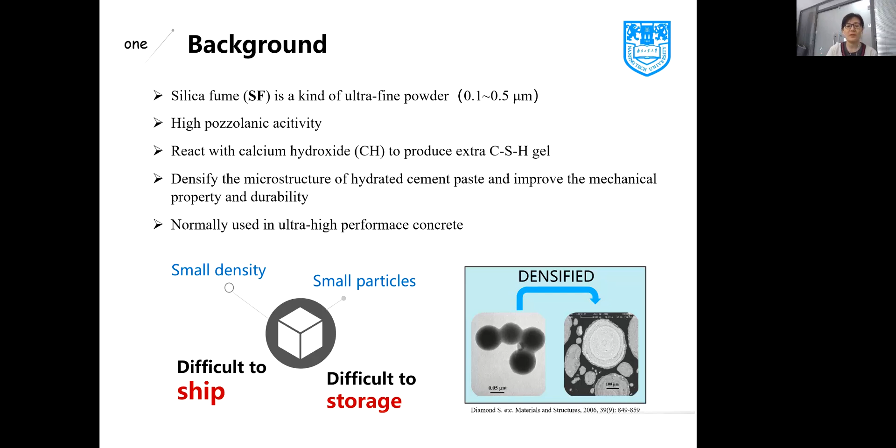Just as it has small density and small particles, it's difficult to ship and also difficult to store. So in the market, it was normally densified. There are many methods to disperse densified silica fume in the using process, such as mixing by mixer, ultrasonic treatment, or using dispersant. But it's hard to disperse densified silica fume to micron-sized particles by using a concrete mixer. There are still many large silica fume agglomerations in cement-based materials.

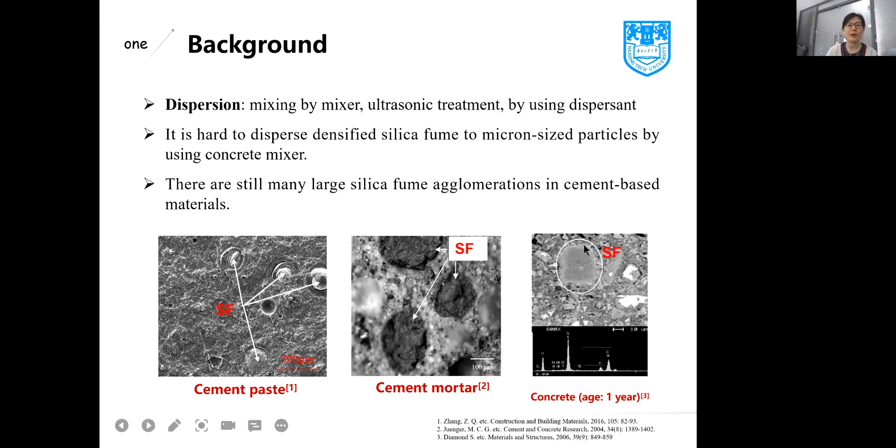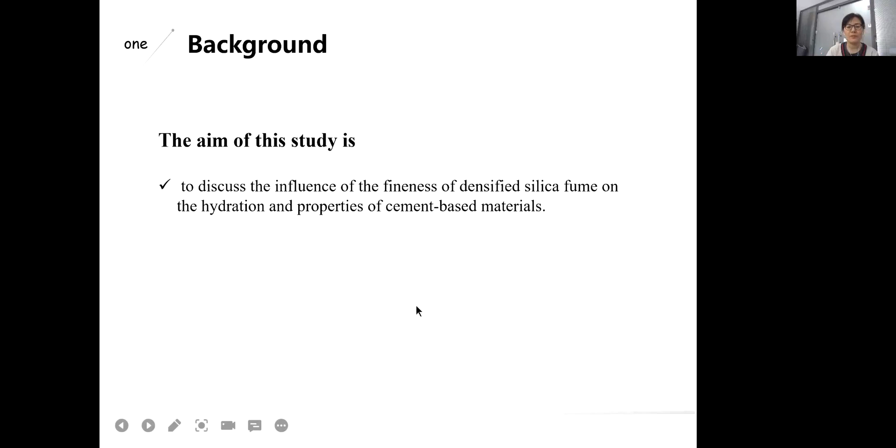From these 3 figures, you can see from cement paste, cement mortar, to concrete, even at 1 year of curing, there are still many large silica fume particles. So the aim of this study is to discuss the influence of the fineness of densified silica fume on the hydration and the properties of cement-based materials. We just focus on the size of silica fume.

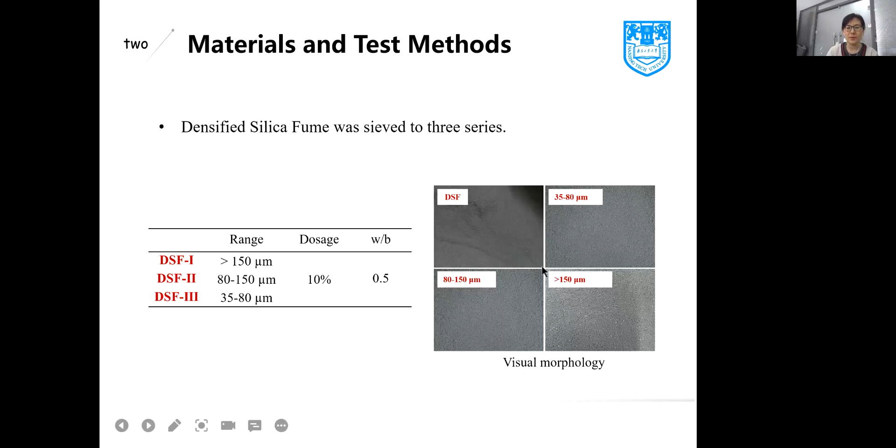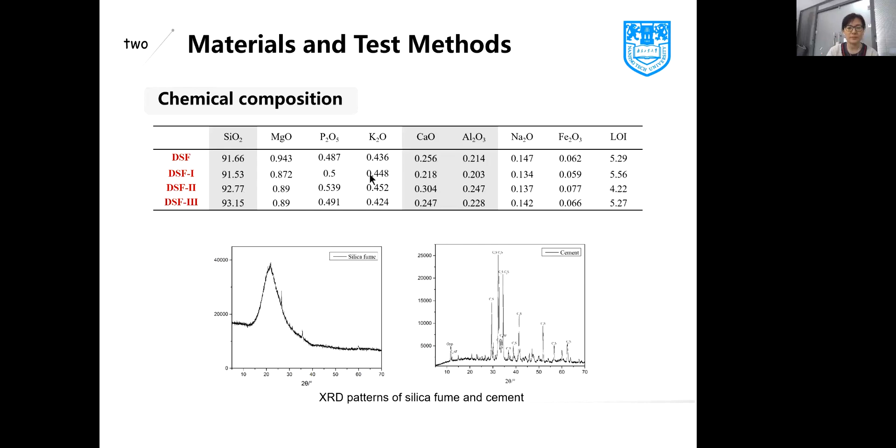The used densified silica fume in this study was sieved to 3 series. The dosage is 10%. Water to binder ratio was 0.5. This is the visual morphology of different types of densified silica fume. We studied the chemical compositions. You can see the change of the fineness of silica fume has no obvious influence on the chemical composition, but it influences the particle size distribution.

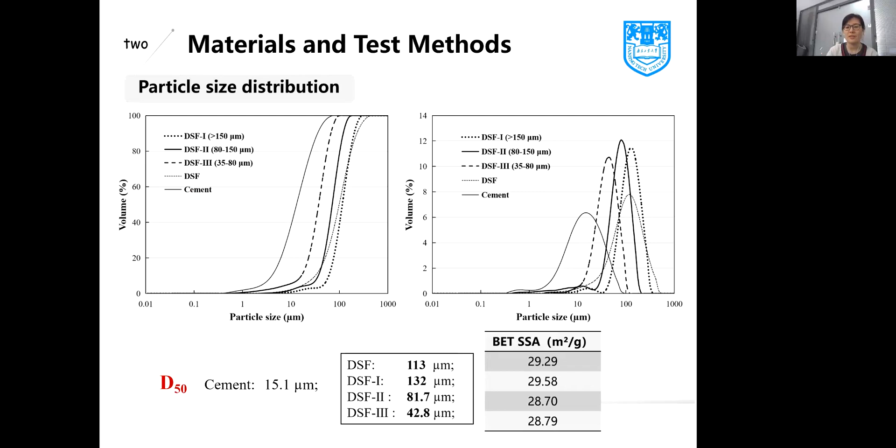It's interesting, we also did the BET specific surface area. The change of the fineness of densified silica fume has no influence on the BET specific surface area. It's around 30. We also studied the SEM image. You can see the size or the morphology of densified silica fume has no obvious change after 1 day of curing. It still exists in the hydrated cement paste as densified particles.

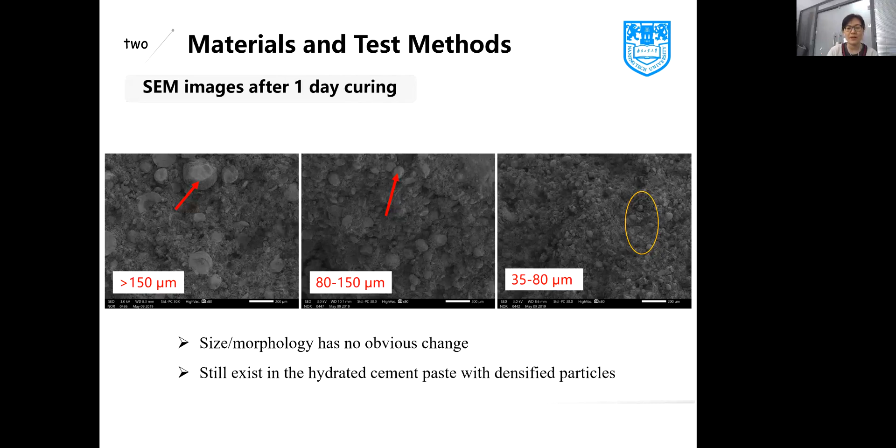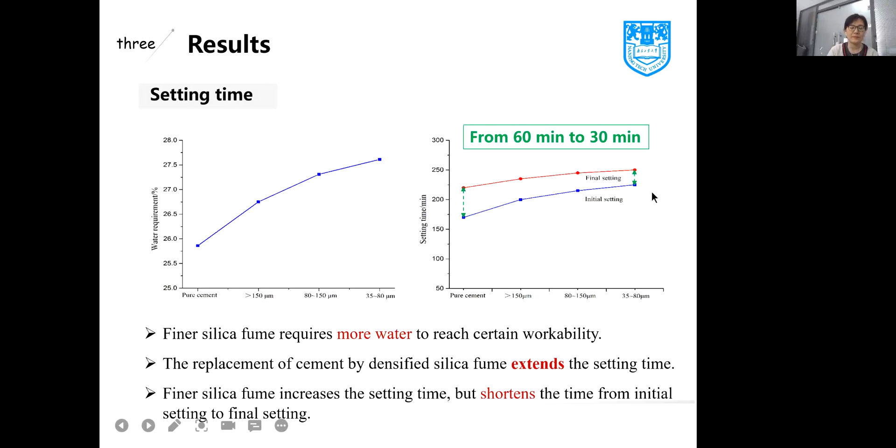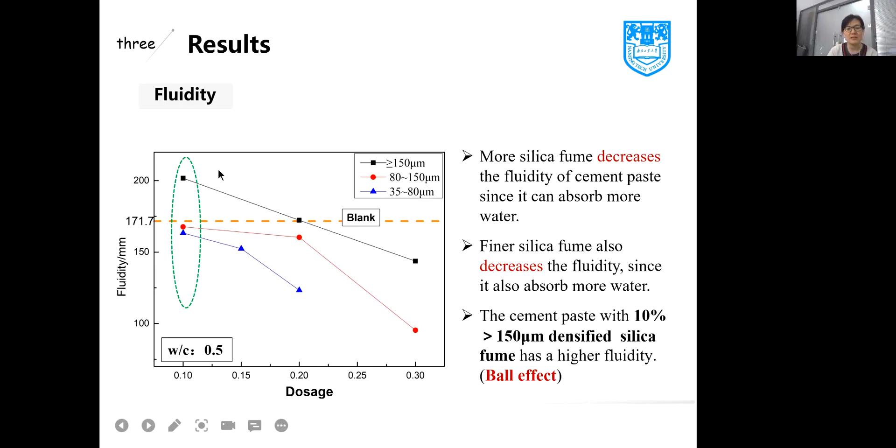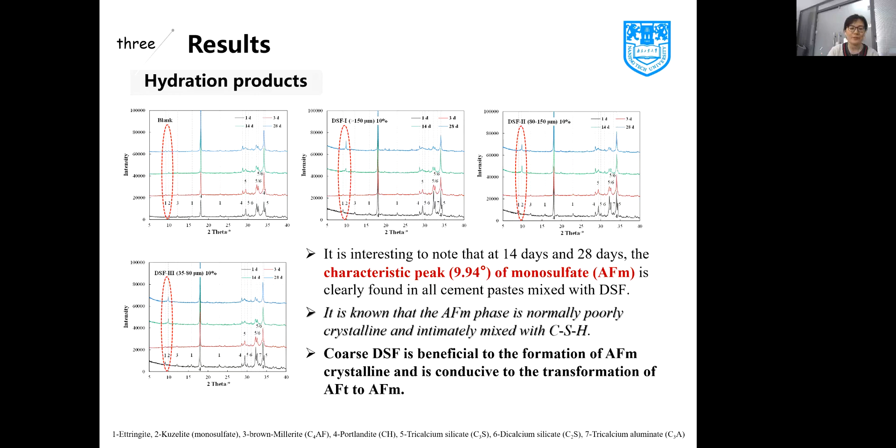We also studied the hydration products of cement paste by using XRD technique. It's interesting to note that at 14 days and 28 days, the peak of monosulfate is clearly found in all cement paste mixed with densified silica fume. It's known that the AFm phase is normally poorly crystalline and intimately mixed with C-S-H. Coarse densified silica fume is beneficial to the formation of AFm crystalline and is conducive to the transformation of AFt to AFm.

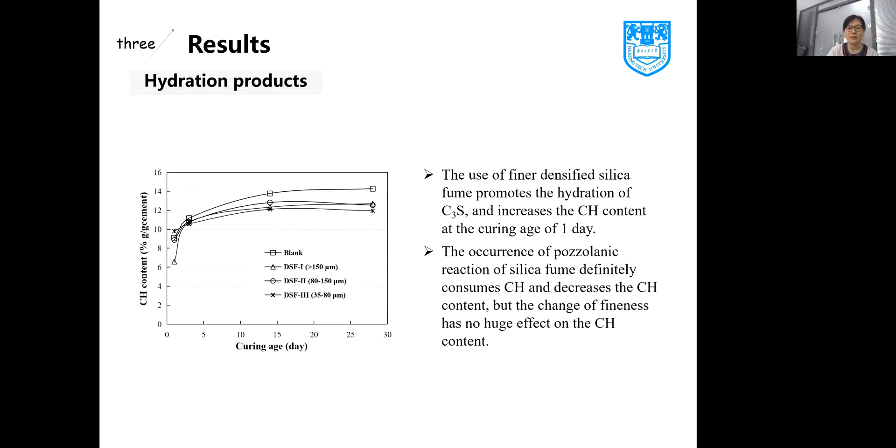The use of finer densified silica fume promotes the hydration of alite and increases the CH content at the curing age of 1 day. The occurrence of pozzolanic reaction of silica fume definitely consumes calcium hydroxide and decreases the calcium hydroxide content, but the change of fineness has no huge effect on the CH content.

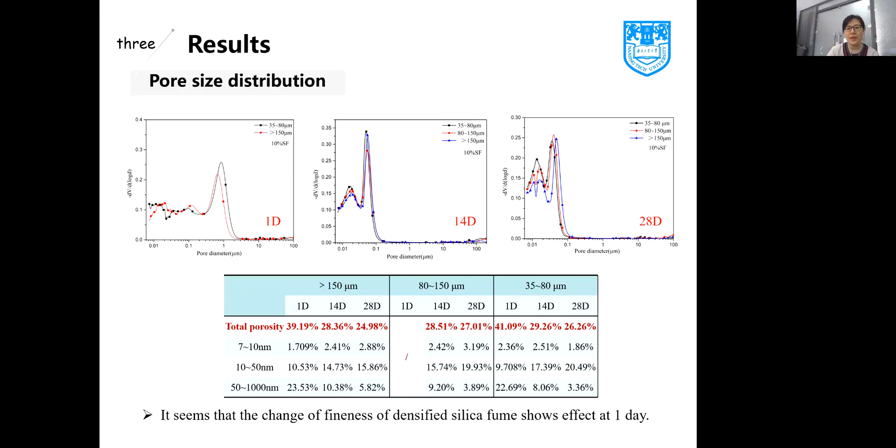We also studied the pore size distribution by using MIP technique. It seems that the change of fineness of densified silica fume shows effect only at 1 day. The total porosity or the volume of different pore sizes has no significant change.

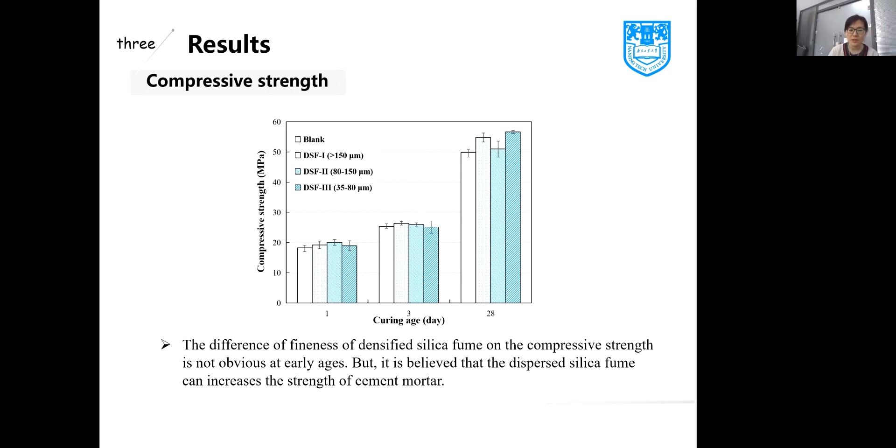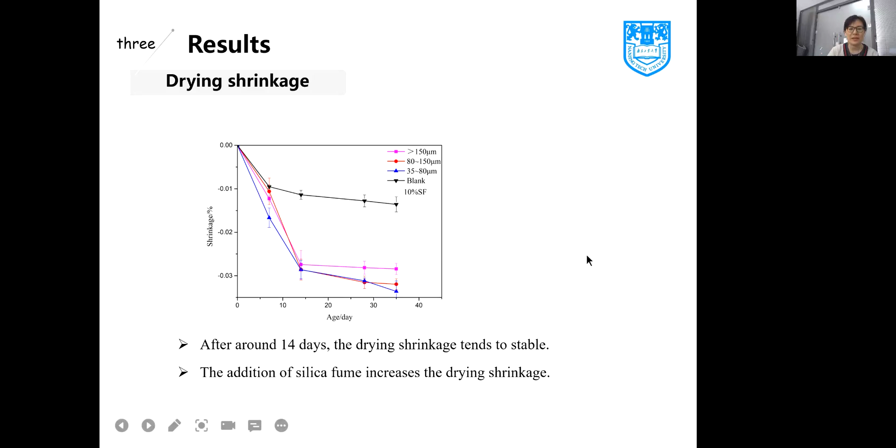This is the compressive strength of cement mortar. The difference of fineness of silica fume on compressive strength is not obvious at early age, but we believed, also from the literature review, that dispersed silica fume or silica fume treated by ultrasonic can increase the strength of cement mortar. Here is the drying shrinkage of cement paste. We can see after around 14 days, the drying shrinkage turns stable, but the addition of silica fume increases the drying shrinkage.

Here we go to the conclusion. Firstly, the change of fineness of densified silica fume does not change the chemical compositions and the specific surface area, but the fineness of densified silica fume changed the workability of cement paste, such as more silica fume decreases the fluidity of cement paste since it can absorb more water. Finer silica fume also decreases the fluidity since it also absorbs more water. After mechanical mixing, the screened densified silica fume particles remain intact in the cement paste.

Densified silica fume is beneficial to the formation of AFm crystalline. At 1 day of curing, the C3A phase is still obviously observed in the samples containing densified silica fume, regardless of fineness. But it seems that the addition of densified silica fume can slow down the hydration of alite. Finer densified silica fume accelerates the hydration of alite, resulting in the increase of the amount of calcium hydroxide. The addition of silica fume increases the drying shrinkage, but the change of fineness has no huge influence on the drying shrinkage.